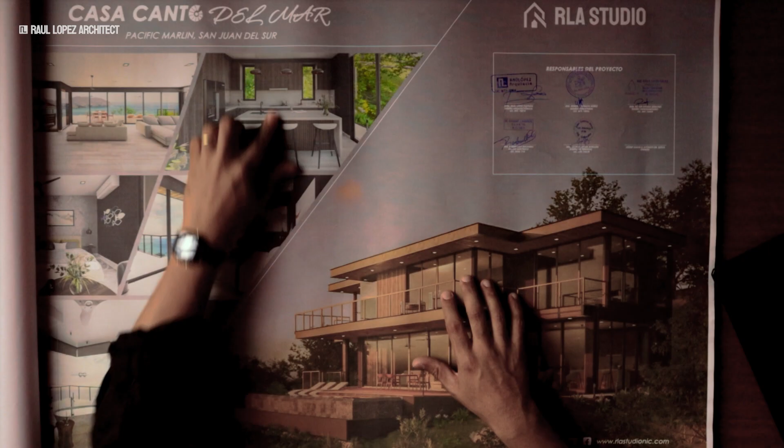This is the large format for the drawings that the City Hall is requesting for permits. We have the cover of the drawings where you can see the interior renderings, the name of the house, the location of the house, also the main rendering for the main facade in the golden hour. I love the golden hour, and the year.

And finally, we have all the professionals involved in this project, myself and the rest of the engineers. This is very important because the City Hall requests the signature and the stamps for everyone involved in the project, because each professional has a proper license to carry out a designing process.

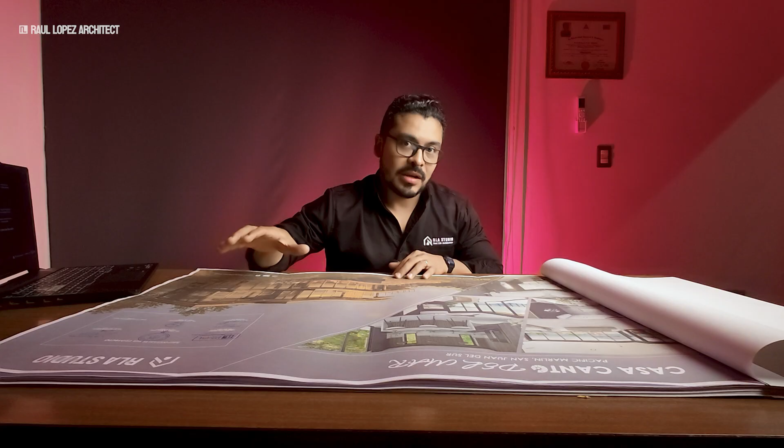So we have the architecture. If you have been following me for a while, you know that the architecture is the essential part of a beach home. So what you have here is the site plan. In the site plan, I am showing the elements of the project: the main house, the pool deck, the carport area and storage area, the main access from the main road of the development. Also, I am presenting all the setbacks and every point of the polygon of the property lines.

This is very important, and the setbacks are very important in order to follow the regulations of the development. Sometimes when you are requesting the CUS, which is the first permit before starting the designing process, the HOA has other regulations. But what is priority is the HOA, because each development has its own rules.

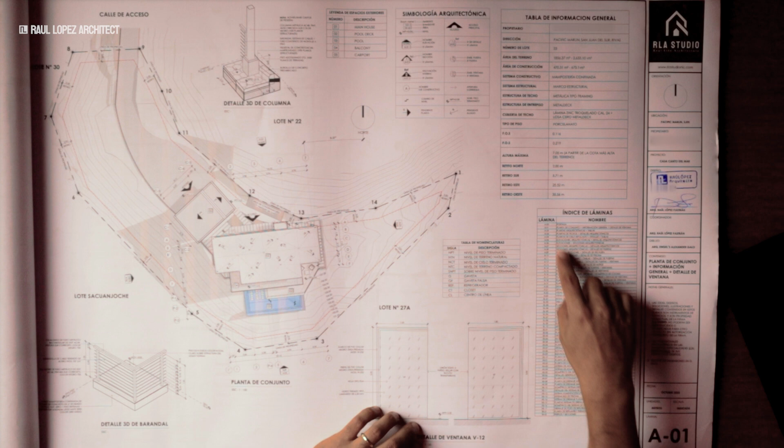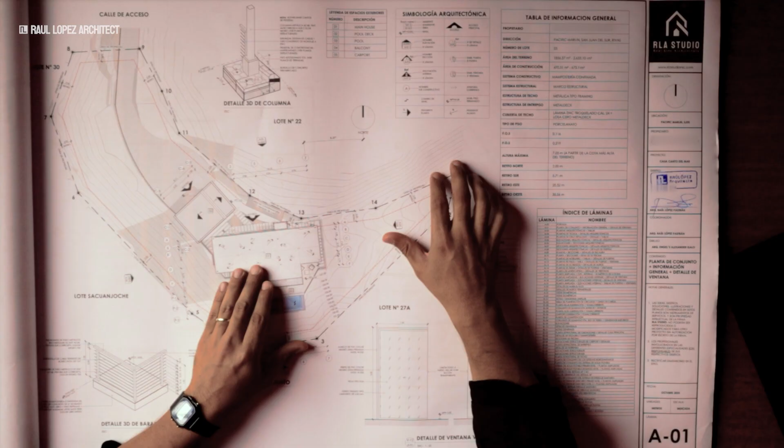So we have the index over here with all the sheets: architecture, electrical, structure, plumbing, and finally earth movement. We have here all the general information: the owner, the location, the lot number, the lot area, construction system, structural system, maximum height, and the symbology of each symbol on the drawings. This way the contractor or the clients can know every specification in the architecture.

So we have also the floor plans with all the dimensions, because as I mentioned before, this is what the contractor is going to have in his power in order to have the proper execution of the project. So every dimension is very important. And obviously this is the printed version, but my client and the contractor should have the digital version as well.

As you can see, this drawing has my signature and my stamp. This is very important for permit. Again, if you don't submit a drawing with the architect's license or the architect's signature, your project is going to be rejected. Very important, that.

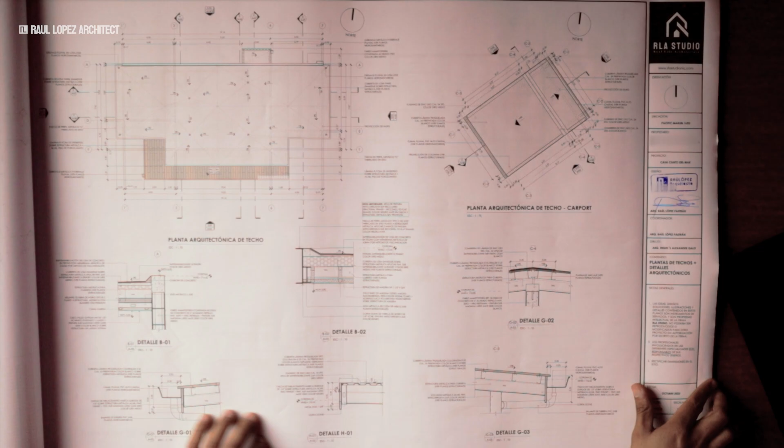And also we have the roof plan. This is a slab because we wanted to keep a thinner roof line in the very front of the house, the main facade. Also we have the roof plan for the carport area and other details. These are enlarged details of every point on the roof: the gutters, the type of roof, the connections, the slopes, etc.

These are the ceiling plans. In these drawings, we can see the type of ceiling. We can say if we are going to be using a wooden ceiling or just a simple drywall. For a beach home very close to the ocean, I do recommend using drywall, the moisture-resistant one. And also we can use wood, but you need to be careful with the maintenance.

Also, we have here in the carport area, we don't have roof ceiling. We decided not installing ceiling here because it's just like a carport. We can invest that money in better furniture for the main house, for example.

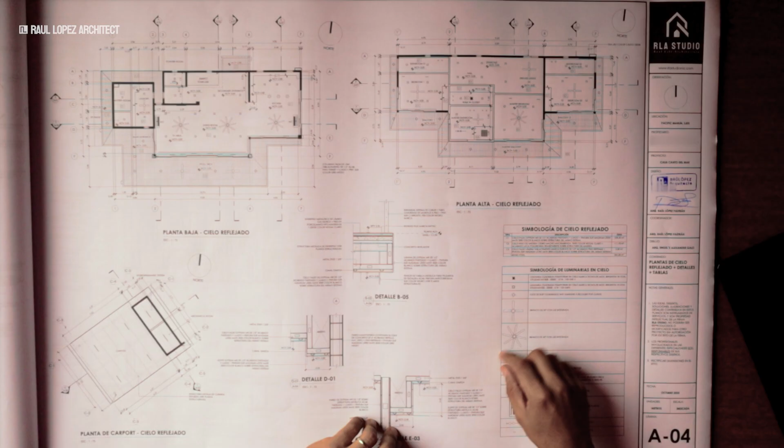So we have the ground floor and the first floor area. And also we have a chart for the symbology of every light, every recessed can light, and also the ceiling fans, some details, for example this soffit, with all the dimensions. This is very important to have the dimensions.

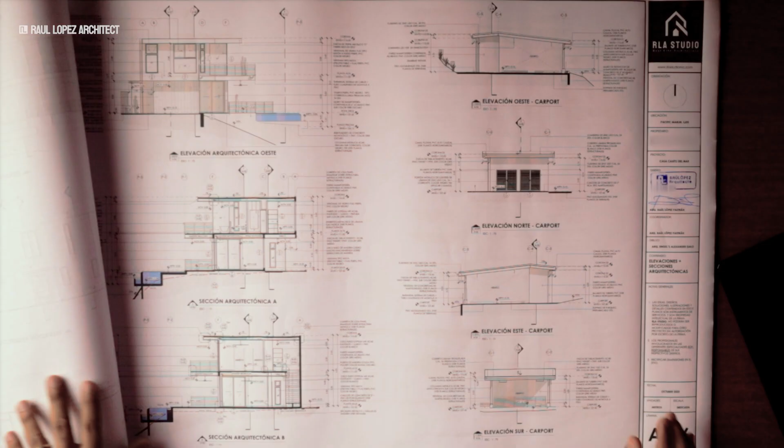And over here all the architectural elevations, all the views - the main facade, north, south, east and west facades, all the specifications. We love to specify everything, this way everyone is on the same page. We also have architectural sections, sectioning the house from so many directions, giving more info to show the contractor.

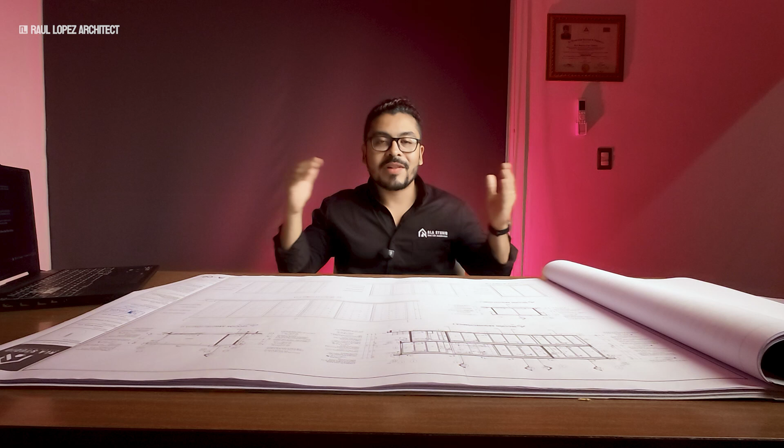Also we have enlarged details for the doors, the sliding doors. As you know, we need to take advantage of the really nice view, so we are proposing panoramic sliding doors, a lot of glass around the house, and we have reflected all the dimensions for those sliding doors.

Also we have the details of the contemporary staircase design. We are using cables instead of railings or glass railings, for example. And I love the design of floating steps - the effect that the steps are floating - and using wood as the finish. That's really nice.

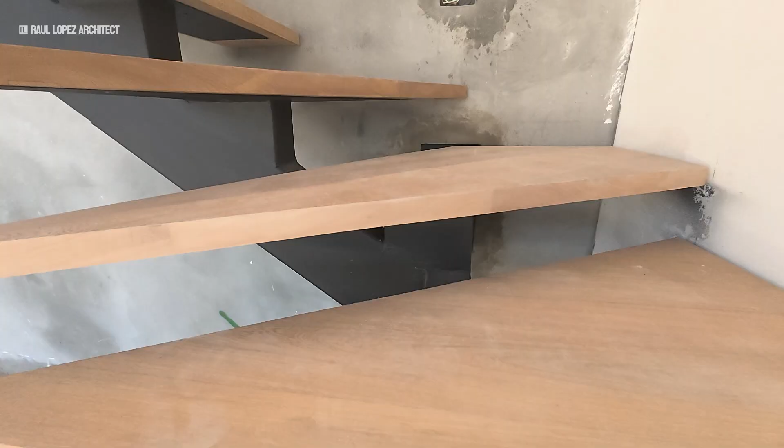And also underneath the staircase we have a portion of that space for the powder room. We are trying to keep privacy for visitors using the toilet.

And over here we have the pool details. All the pools need to be built using concrete and rebar. That's very important - the water is really heavy, okay, really heavy - so we need to use monolithic concrete.

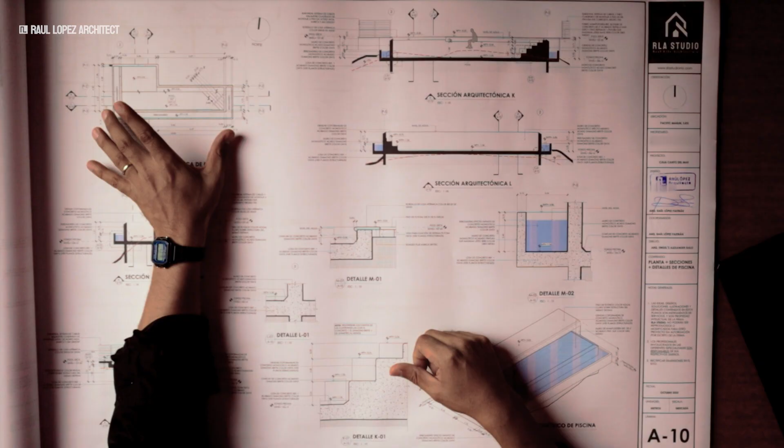And I love this pool because it's not a huge pool, but its length is really nice. We can stay swimming or drinking a toña or flor de caña looking towards the San Juan del Sur Bay. So here we have all the dimensions, all the specifications. This is an infinity effect pool, which is phenomenal in that spot of San Juan del Sur.

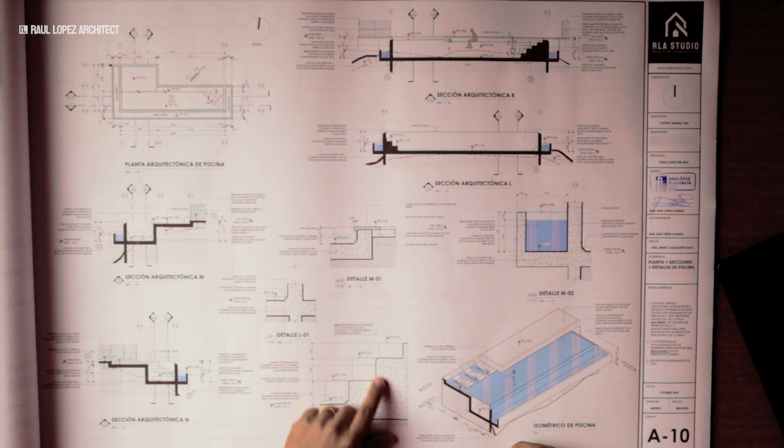This house is going to be built in Pacific Marlin, so you will see the combination of the water with the ocean - that is going to be amazing. So we have all the specifications, even for the steps and the pool finish. We are using Diamond Brite onyx color, which is something darker, but it matches perfectly with the look of the house, which is a contemporary look.

And also we have a floor plan just for the furniture. We have built-in furniture and movable furniture, so everything here uses a code. This way when our client is going to buy the furniture - couches, beds, etc. - they already know the dimensions they need to respect in order to fit everything in the design.

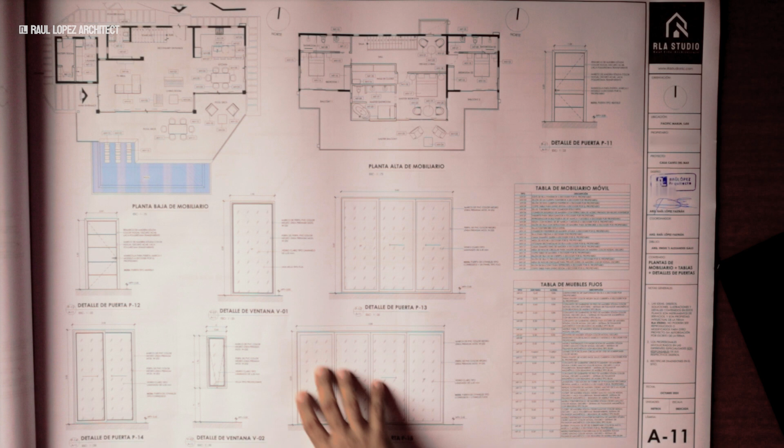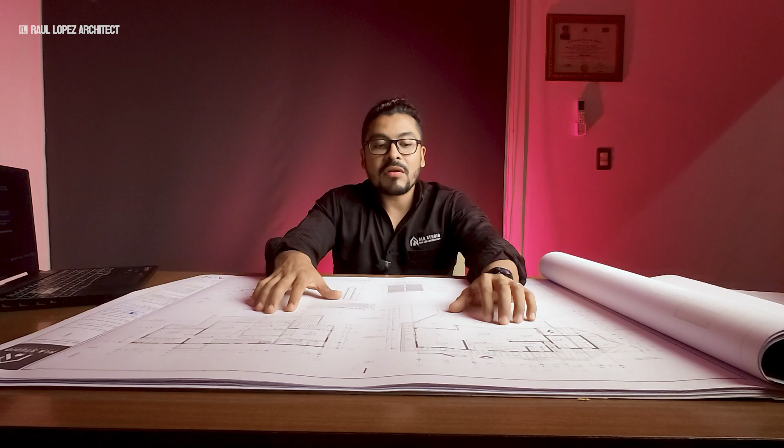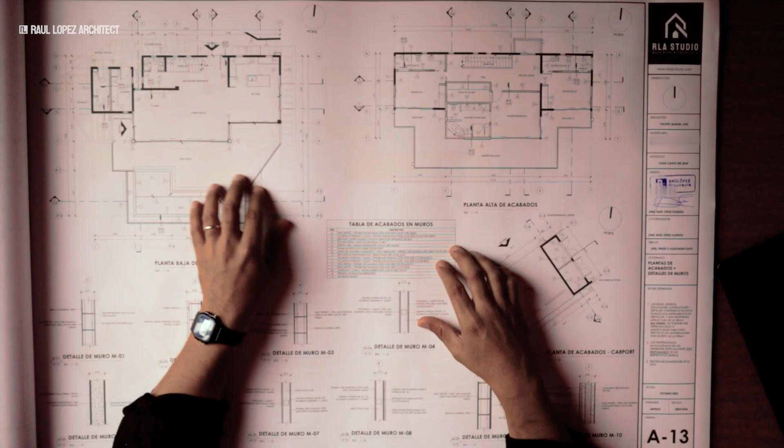So we have here the finishes floor plans using these codes, and if you go to this chart you will see which finish represents every code - for example, if it's just a regular paint, or if we are using cladding stones or wood or a special tile on the walls.

So that's very important. Also we have here a catalog of all the walls and their dimensions - this is very important in order to achieve the right thicknesses of the walls.

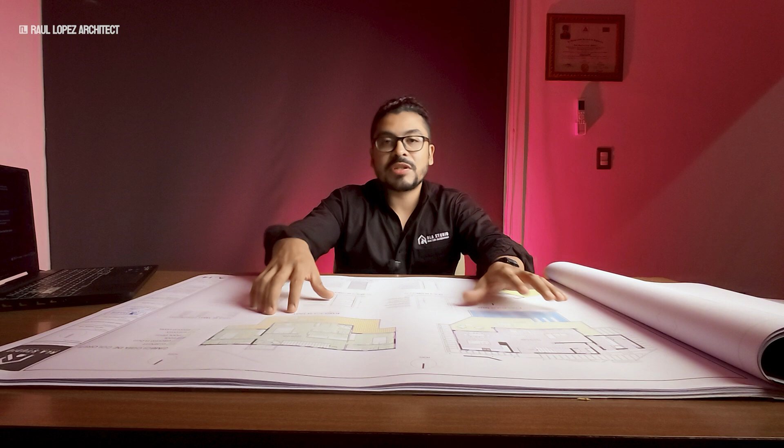This is the landscaping site plan. We are proposing all the plants, the grass, etc. I really love to use Catarina plants - in other videos I have shown you this amazing place; if you want to see that video, you can use this card. And yeah, we have a chart showing all the species of the plants over here with their names, so this way it's easy for the contractor to find them.

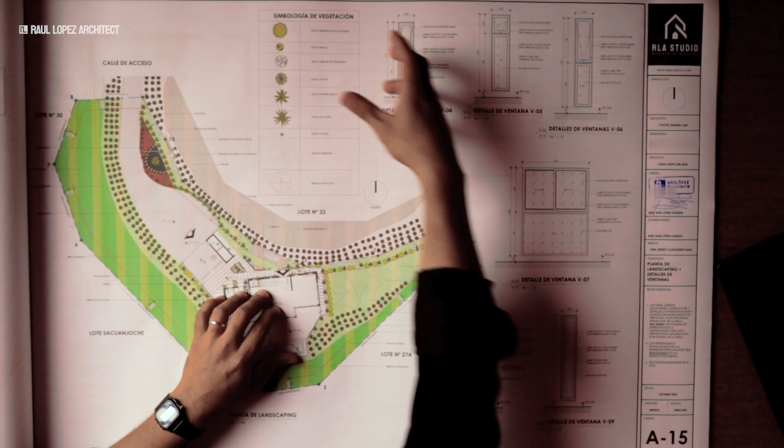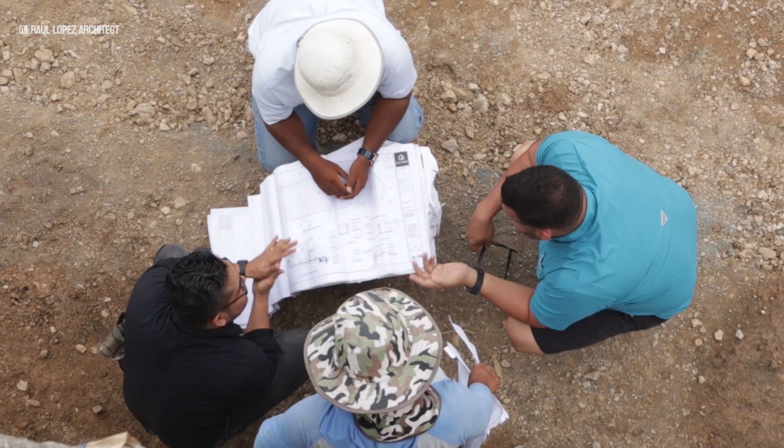Also we have enlarged views for the kitchen and also all the internal views around, and also a 3D model. My team and I love to specify everything, even the appliances, the lighting fixtures, plumbing fixtures, the cabinetry - all the dimensions are here.

Also the same for the laundry room - this is the laundry room with all the specifications.

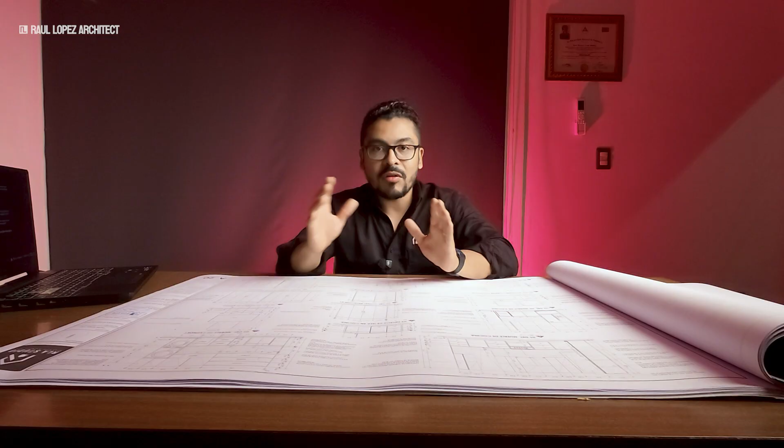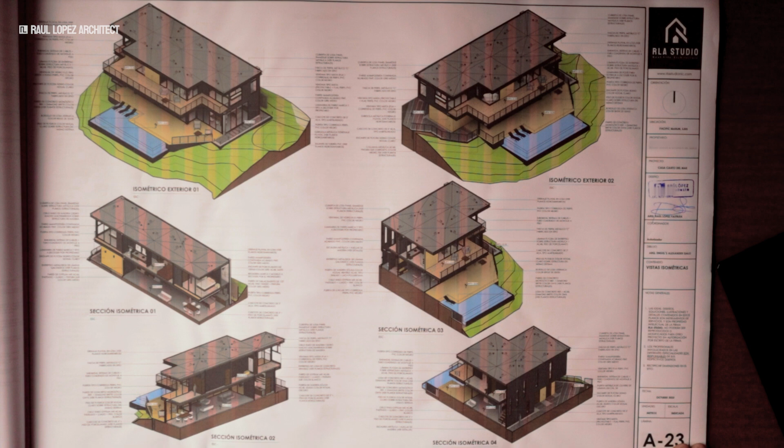We have the master bathroom as well, the secondary bathrooms. We also have details for the closets, the cabinetry of the whole project, and other details like the road, the paving stones, retaining walls around, and etc. We have 3D views of the master bedroom, and internal 3D views of the bathrooms, the master bathroom, the laundry, the secondary bathrooms. And finally, for architecture, we have the exterior 3D views, to have a clear vision of the whole project, architecturally speaking.

Now we have the structural drawings. This is the 3D model of the structural analysis, with the signature and stamps from my structural engineer. We have general notes about how to carry out the structural phase in construction.

Over here we can see the foundations plan, with all the footings, isolated footings, continuous footings as well, and the structure of the pool. We have details of the footings, the rebar, and how the rebar connects to each other, plus the connections between the metal structure versus the concrete structure with rebar.

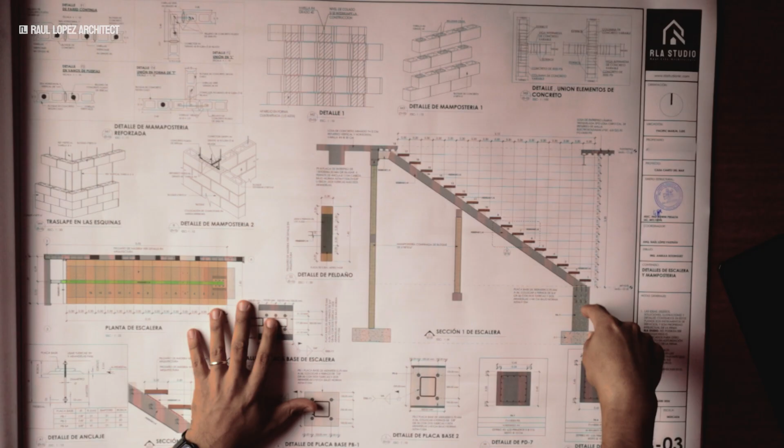We also have the structural details of the staircase, where we combine the metal structure with concrete. Also the structure for the pool, and the depth we need to respect in construction for the best performance of the pool structure. As you can see, we have a structural mesh, which is rebar. And we also have a chart for all the concrete sections with their dimensions.

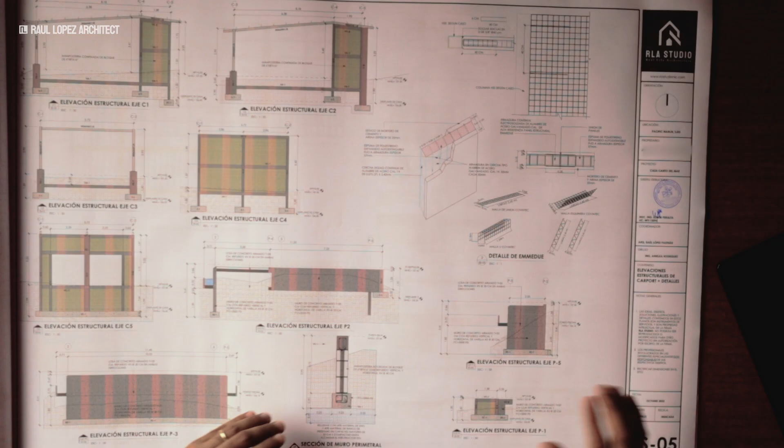We have the structural elevations. We are using masonry combined with concrete beams and concrete columns. That's the best for a high-end home. Remember that, because this type of construction needs to last.

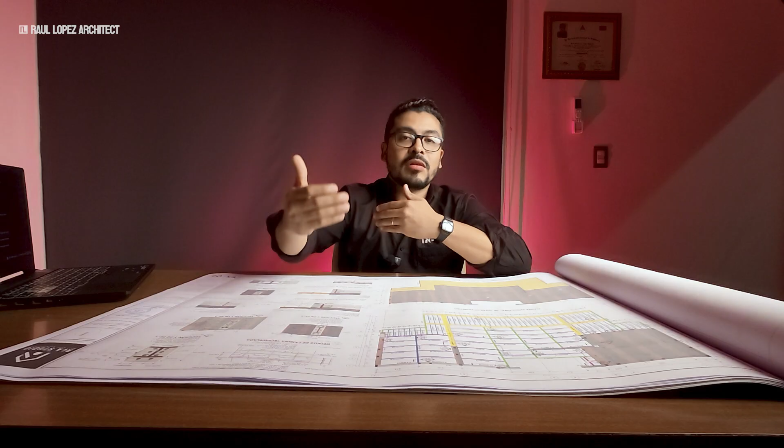Also, we have the structural plan for the first level. This is going to be a slab, with the structure based on metal, using all metal profiles. This is lighter and easier to install, but we need to use a special paint because we are very close to the ocean, and the thicknesses of this structure need to be stronger. So here we have the slabs and all the structural connections, the metal connections with the plate, the welding specifications and everything.

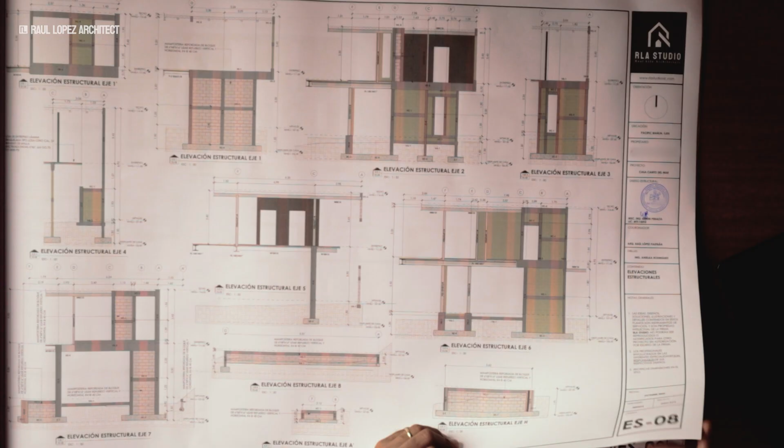We have more details - this house is huge, so we need a lot of details, including structural connections between the metal and the concrete. We have more elevations, structural elevations, describing the levels, the height, the axis, and the metal specifications. Finally, this is the structural roof plan.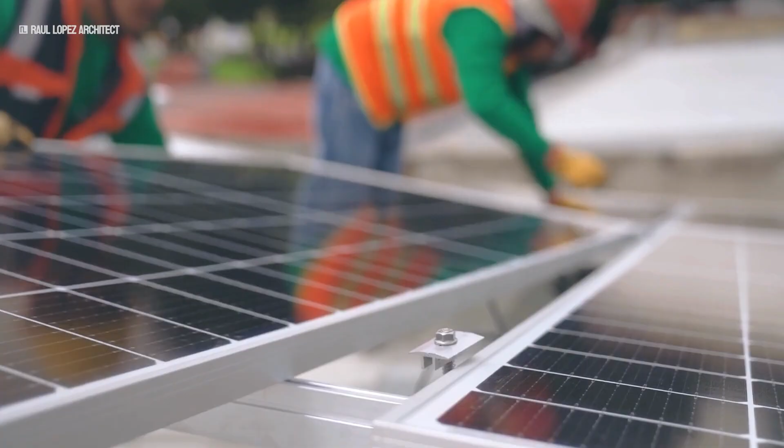We are using a slab - this is a special slab called M2. This is lighter and avoids heat from the exterior. We are taking advantage of that because we are going to install a solar panel system on it. We have more charts with structural concrete beams and also metal beams. These are W beams.

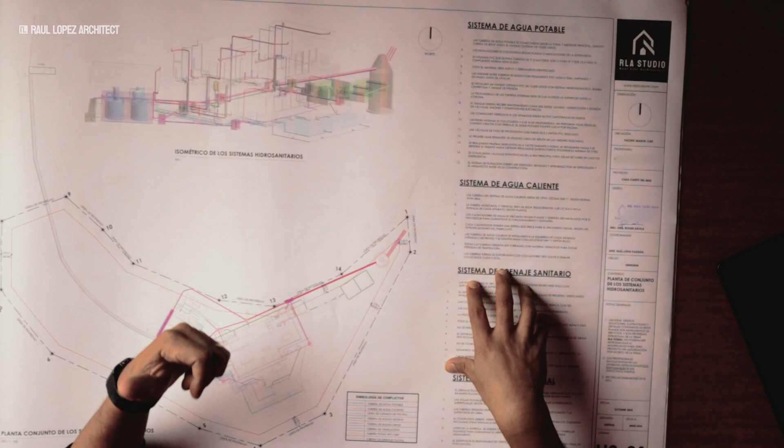Now we have all the plumbing networks - we're looking at the cold water and hot water networks, the drainage networks, and the septic system lines as well. I love to see all the connections, all the networks, in a single plan. This way it's easier for the contractor and for us to see if we have any mistake, like crossing some water lines or whatever.

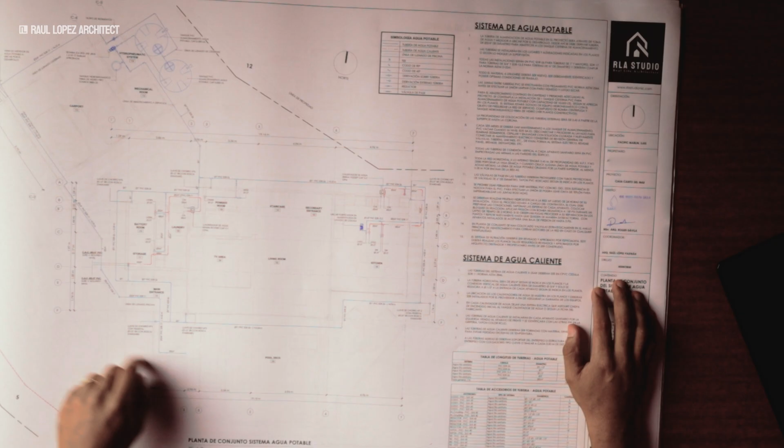So we have here the general notes of the hot water, cold water, drainages, drains, and this is the cold water or potable water connections and lines. We are routing all the network outside, so if in the future you have to fix a connection, we don't have to remove the tile on the floor. I love to have everything with the plumbing engineer's signatures plus stamps.

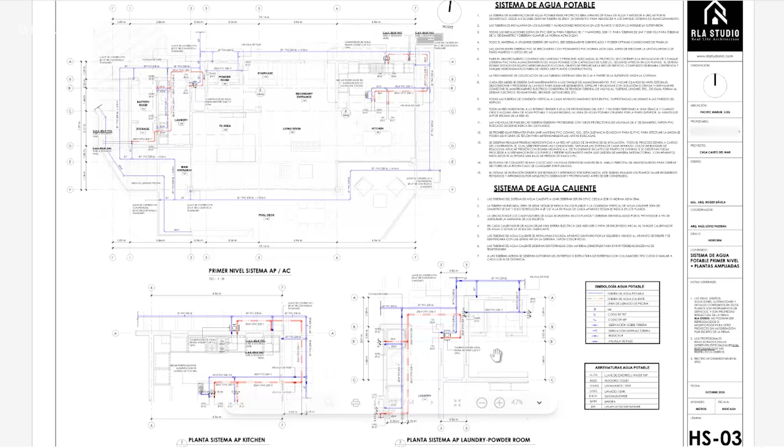We have enlarged views as well. This is very important to have a better comprehension of what's going on inside the plumbing features, faucets, the toilet, the sinks. We have more enlarged views, and this is a 3D view of the network matching with the 3D of the house. This way it's easier to understand, for example, the water heater positions, connections, and locations, and also the water cisterns.

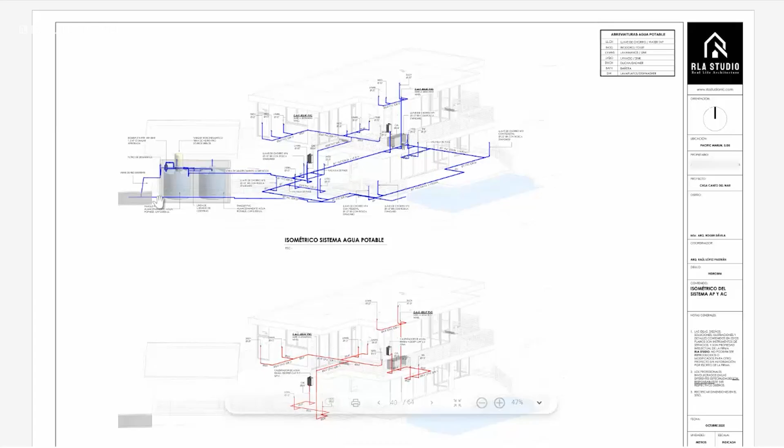I do recommend using at least 2 water cisterns because during the dry season this could be hard. Over here we have the water cistern details. I recommend building a cinder block protection all around for warranty purposes.

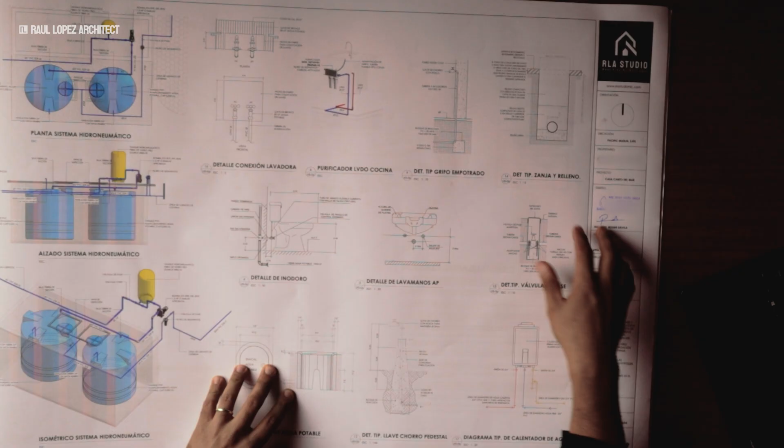And also we have all the details, for example, the toilet installation, the sinks installation, the garden faucet installation, the water heater installation. By the way, I do recommend installing a propane water heater instead of an electrical one.

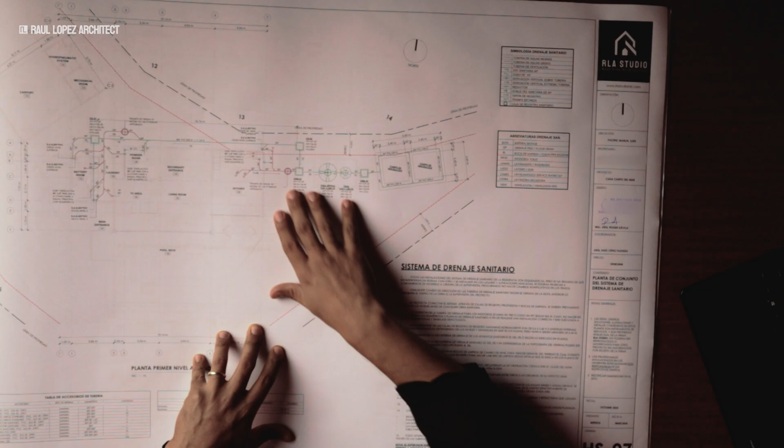And over here we have the septic system network. I like to separate the gray water from the water coming from the toilets, because in the future we can use that gray water to keep the greenery and lush of the garden within a special filtration system. Over here we have the septic tank and FAFA, which is a filter, and finally the leach field. This is very important. This is what works in the San Juan del Sur area.

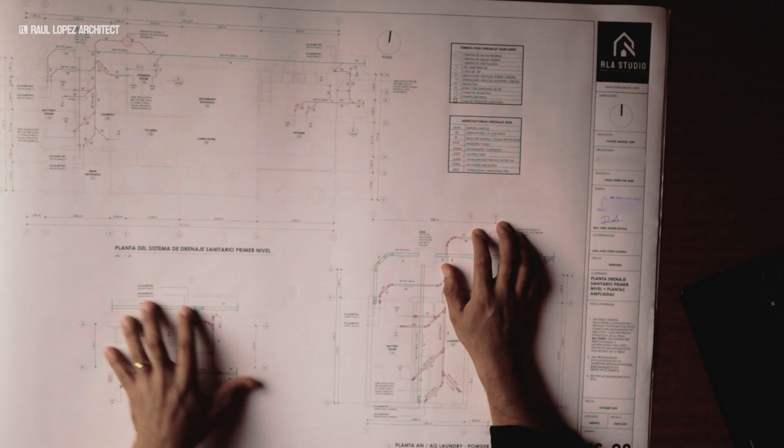Again, the last one was the ground floor, and this is the first floor septic system network. We have dump pipes for the drains, gray water and the water coming from the toilets, and also we have enlarged views for that. In these enlarged views you can see the thicknesses of the pipes as well. This way we can really know how to fit everything to have a perfect system.

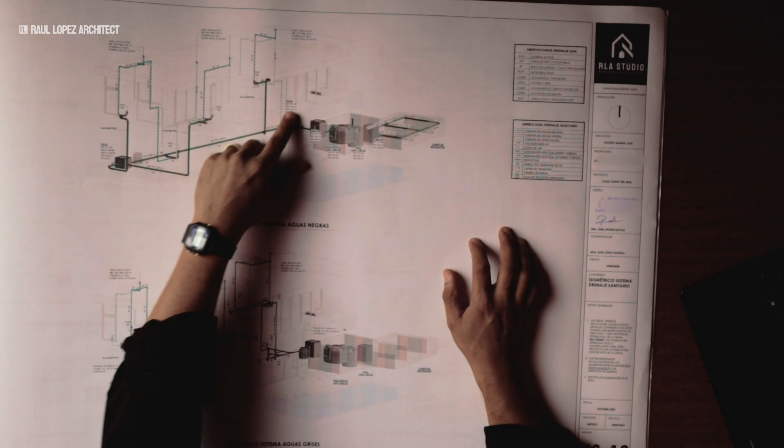More enlarged views from every bathroom, and from the laundry room as well. And this is a schematic 3D view showing the septic system and the leach field. This is really important. And those are the vents - those pipes are the vents that go to the top of the roof in order to avoid any bad smell.

More details on how to install the septic system, the filtration system that goes to the leach field. These are the propane lines as well, because we need a proper propane network in order to have a safe house - talking about the range, the barbecue, the gas water heater as well.

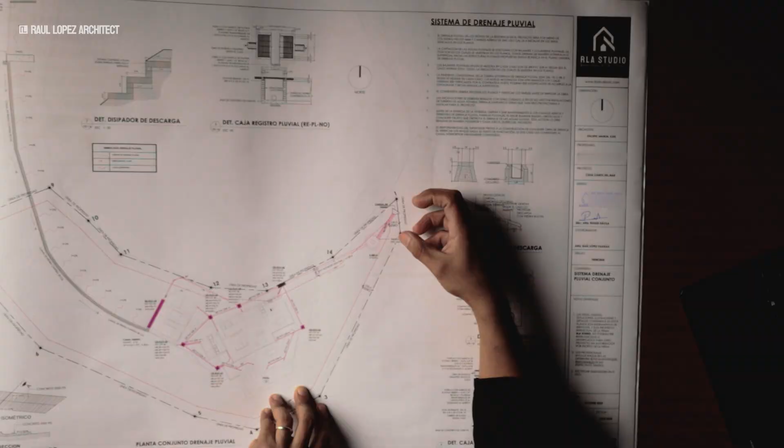And finally, these are the drains for the rainwater - all the pipes that are collecting the rainwater. For your information, we have neighbors below and neighbors on this side, and the only way we can avoid any issue - we cannot throw the rainwater to your neighbors by law. So what we usually do is an infiltration well, and when this well is full, we have another system that throws the extra water to the street, but it's not a lot of water.

Yeah, this is the same, all the drains for the rainwater evacuation. So here you can see another 3D view of that rainwater system, and this is the infiltration well. All the drains, all the details for the drains, for the pool, the balconies, etc. are here. This is a special detail for the infiltration well.

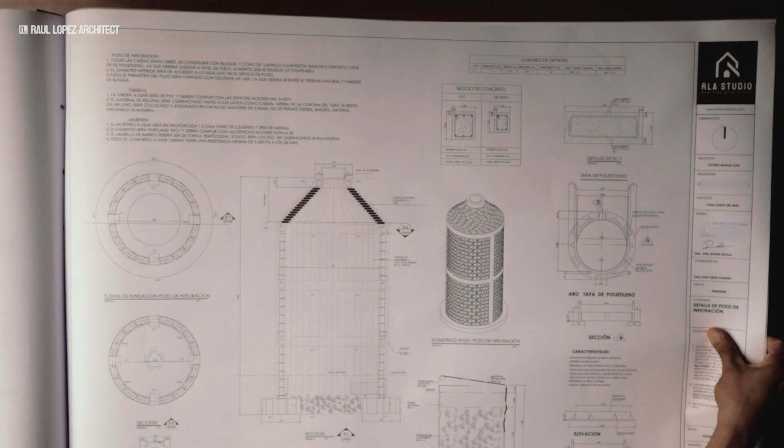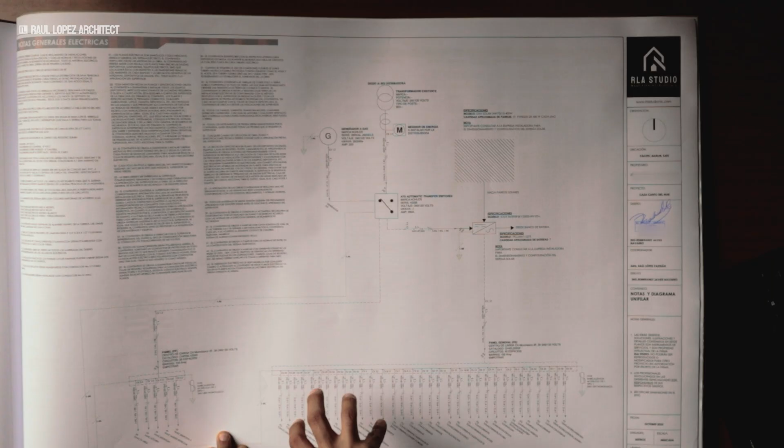This is very important to have the best guidance for the electrician. Also, we have here the calculations - all the electrical calculations, all the loads balanced in this chart. And over here we have the position of all the lights, all the ceiling fans, the recessed can lights, the symbology of every light switch as well.

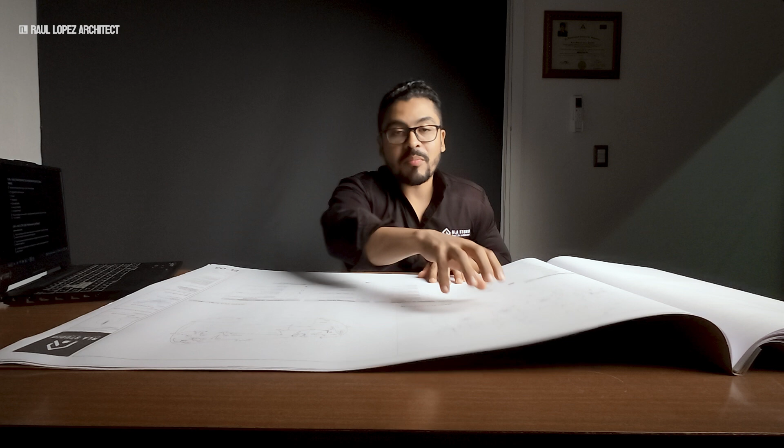It's very important to have the right position of the light switches, because every person is different. We have different routines when we are waking up, or if we love to read, or if we don't like to read. So it's very important, the position. For that reason, I carry out a Zoom meeting with my clients, or a face-to-face meeting, in order to place the right light switches position.

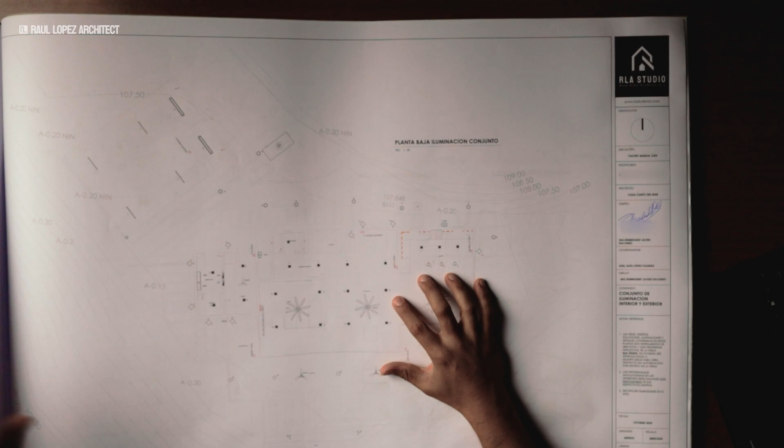So this is the ground floor again, with all the lights, all the light switches positions. This is very important.

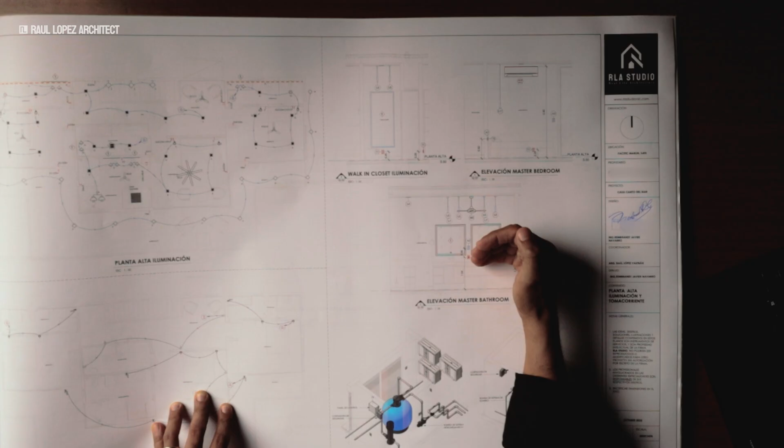This is a special detail for the pump for the pool, the pump for the water cisterns as well, the filter, etc. is here, in order to show the contractor the right pipe installation, the bulbs, etc. Also, we have enlarged views showing the electrician the right position in terms of height of the light switches and all the lights as well. The same over here.

For example, here in the kitchen, I'm showing the electrician the right position for the outlet for the range, for the hood, and other secondary outlets. Also here in bedroom number 2, the right position for every outlet and every light switch, and also the switch for the ceiling fans.

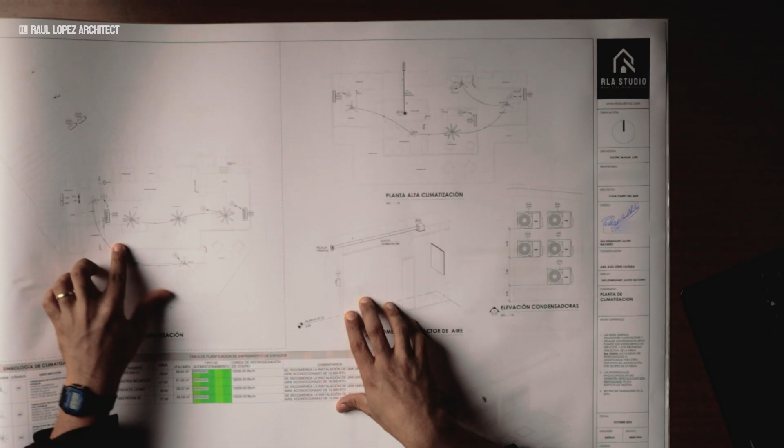And this is the AC unit floor plan. I'm using a cassette version, one direction, because the thickness of the roof is low, so I need to use this to avoid any ugly split AC unit. And also we have the position of the condensers, which are hooked in the wall of the carport area.

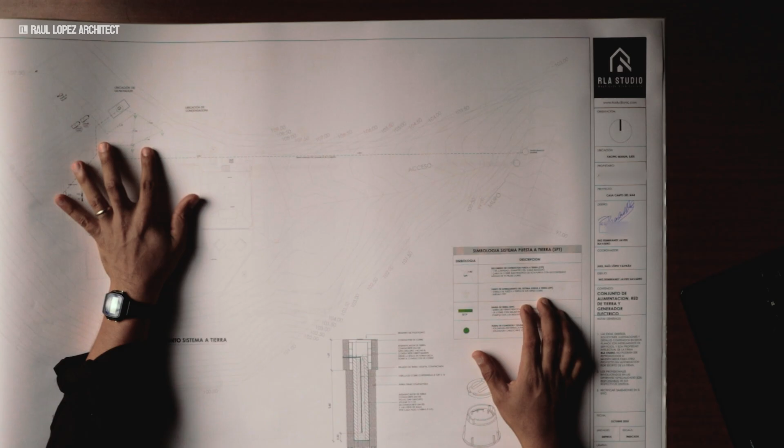And finally, we have a diagram for the future generator. This is very important as well, because at some point the batteries during the winter season can get down, so we can have a second backup. We also have more views for the correct installation of the light switches, etc.

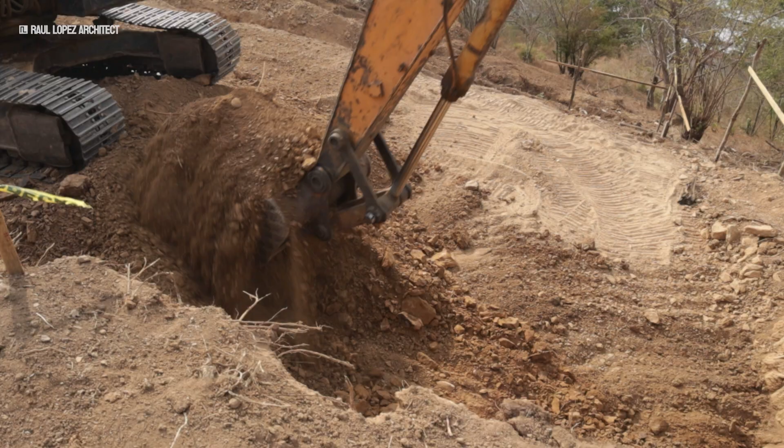And also we have the earth movement. This needs to be calculated by my civil engineer, who will calculate the cuts and the places we need to fill with new dirt from a mine. That needs to be calculated in order to know how many machines we need to carry out the construction process, because the cost of machinery is calculated based on the amount of dirt we need to move.

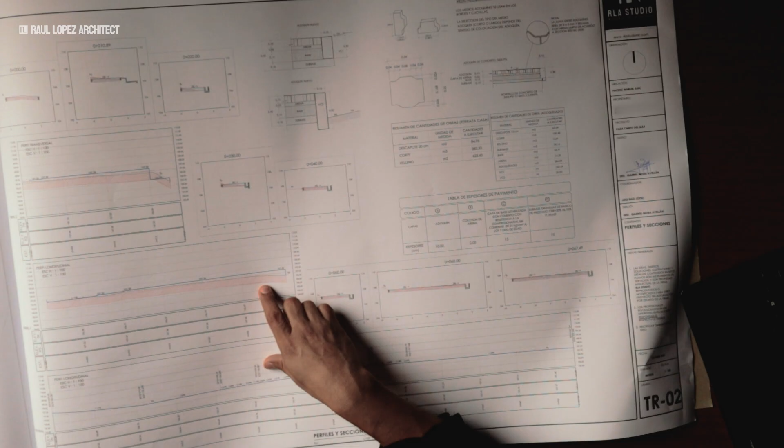Yeah, and finally, this is the last drawing. We are showing the contractor which areas, marked in red, is what we need to cut and get rid of. Basically, this is the set of drawings that we need for a premium home in Nicaragua.

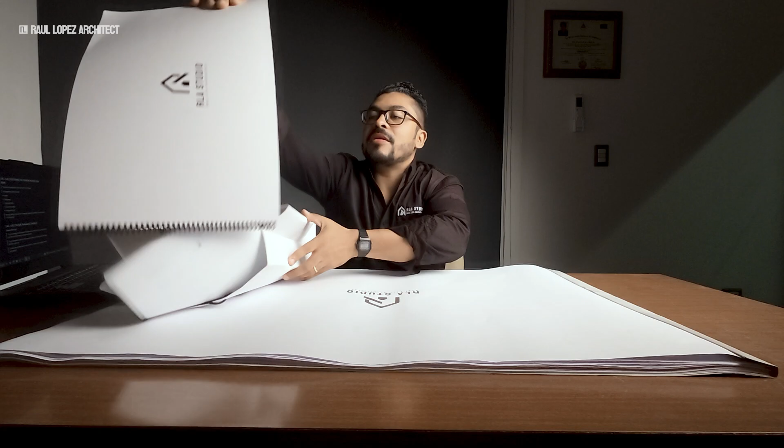But this is not the end. We need to deliver also these documents, which are reports. I used to give my clients all the reports in this book with my logo, this is my personal logo as an architect, and over here we have a smaller version. This way my clients can review the drawings more comfortably.

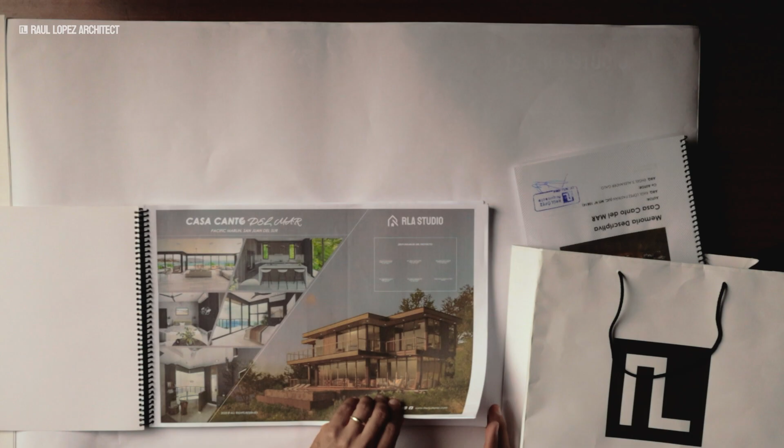If they want to drink a cup of coffee, or if they are going to bed, they can easily read the drawings. This is really nice. We have the same content that we have in the large version here. And also we have all the reports.

This is the bioclimatic report. In this document you will see all the calculations that my team made in order to have a really nice shaded area, for example, because we need to avoid the sun directly hitting the interior of the home. The wind calculation as well, how good the air renovations inside the home are, to avoid using the AC units a lot.

This is the structural report, where my structural engineer calculated all the loads and all the structural connections. Really important as well, because this is the theory behind what we have designed.

And also we have the plumbing report, where we can see all the calculations for the pump of the pool, the pump for the water cisterns, and the diameter of every pipe reflected in this document.

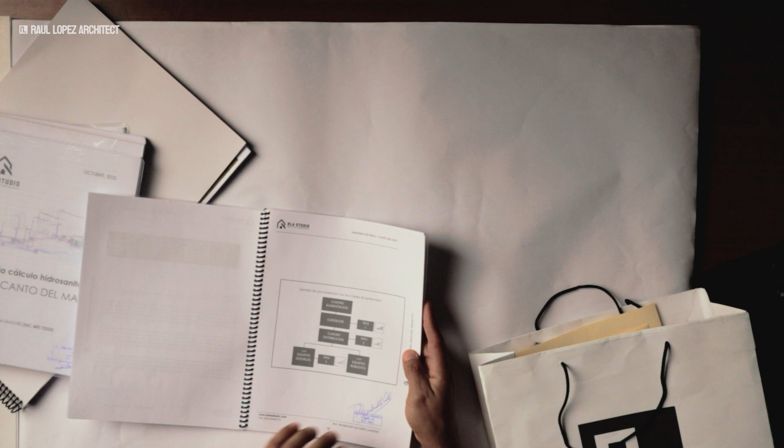And also the electrical report, where we have calculated all the loads, the lights, the outlets, the appliances, and how many solar panels the house will need.

And finally, all the licenses of my team. The city hall is going to be requesting this in order to give you the construction permits. If you don't have the licenses, you won't have the permits.

And everything needs to be in this pen drive. All the digital version is very important because sometimes the contractor needs to reprint another set of drawings, a printed version obviously. So this is very important.

This is what you need to get from an architect when you are planning to design and build a premium home in Nicaragua. If you have any question regarding what you have seen in this video, please let me know in the comments below.